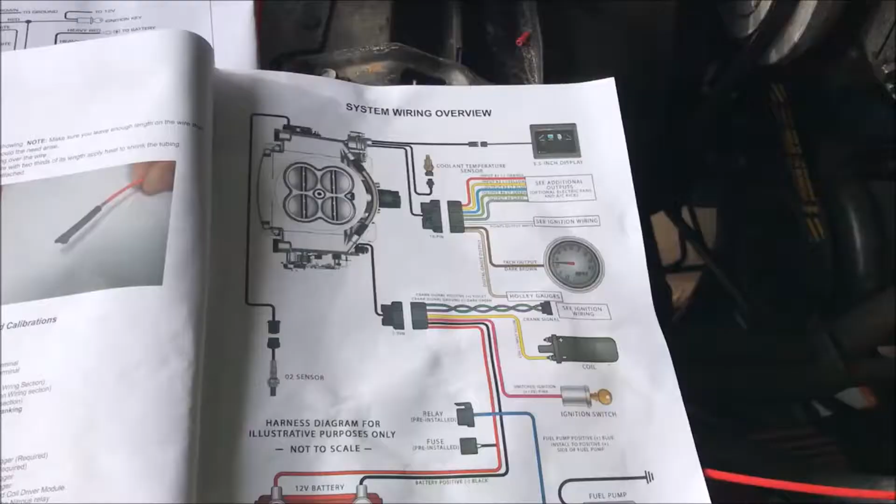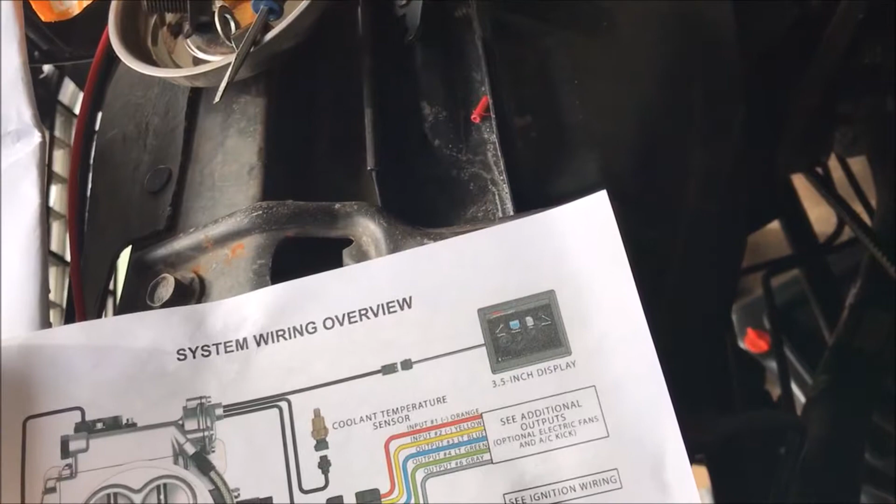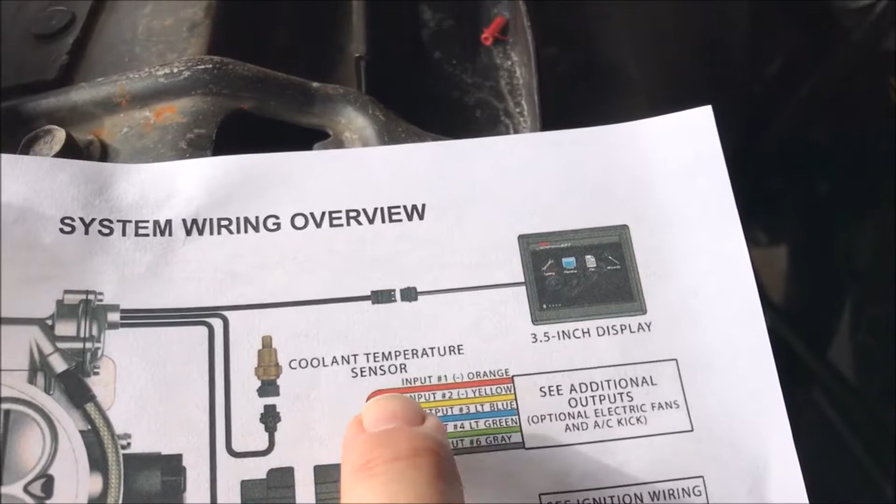Okay, so the last time I worked on this, I started wiring the EFI to the ignition box and everything. Let me show you. There's the main wiring. Currently I have the positive and negative on a battery, which is plugged into the 7-pin harness coming off there. I have the O2 sensor plugged in, the coolant sensor plugged in. I do not have the 10-pin because I don't know if I actually need any of that currently. It's got a tach output, which I'm not going to connect up right now. It's got Holley gauges, which I'm not going to connect right now. It has outputs for electric fans and AC kick down, which I don't think I'm going to need. So all I have to do is connect the display, and I need to connect the purple and green lines.

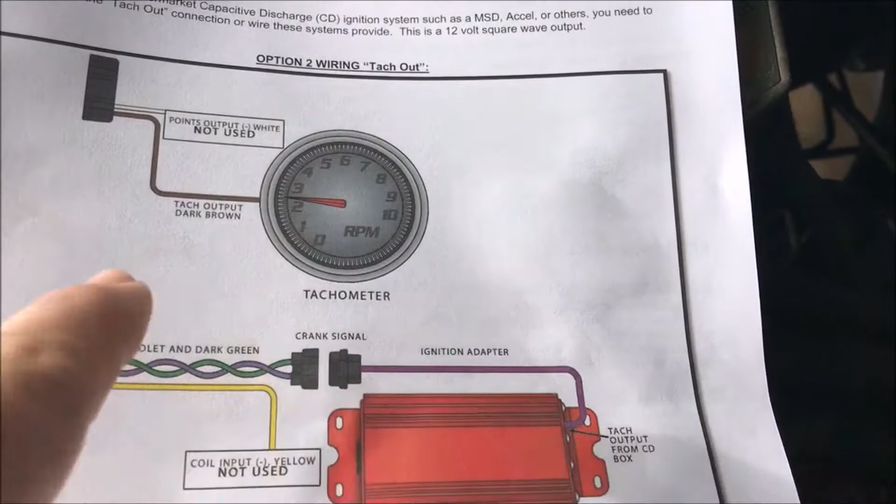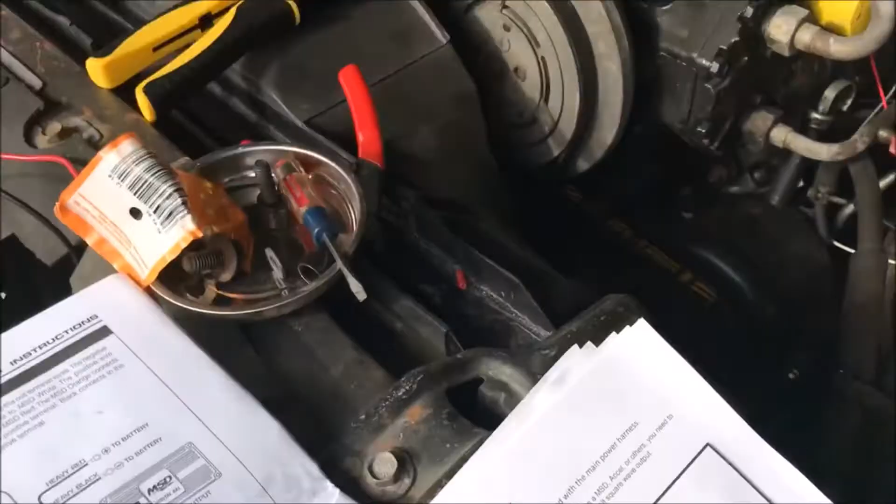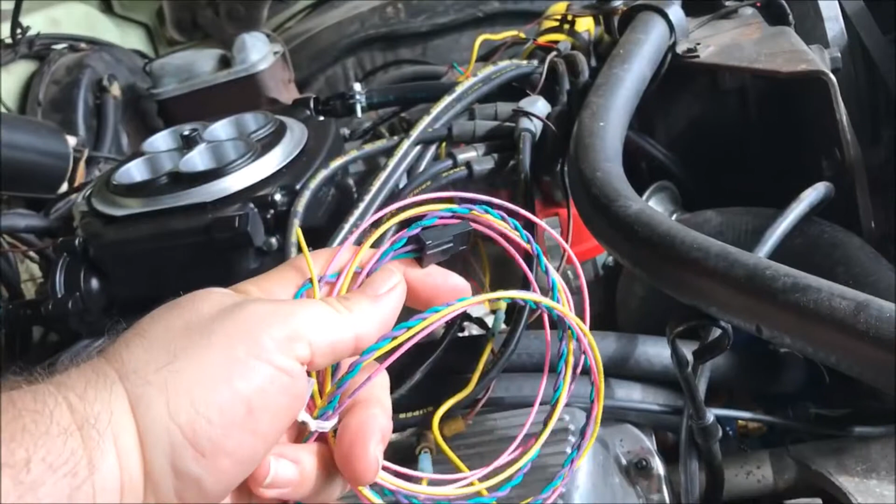So I turn the page, and the ignition I'm using is an MSD6AL. The yellow currently goes to the coil, but we're not going to use that anymore. I need to get the adapter for the ignition, which is going to come from the tach output from the CD box into the green and purple wires. And if you notice on my MSD wiring guide, tach out is a gray wire, and right here I have the gray wire. So I need to connect that gray wire to the ignition adapter and plug it into the green and purple coiled crank signal, which is in this bundle over here. So I need to find that adapter, and then just plug it into this connector, and I will have everything in the engine compartment wired up, even though it looks like hell.

I don't want to finish hooking everything up yet until I get it running, and then I'll clean everything up. I also went out and purchased some more heat shrink connectors, so when I clean this up, it's going to look a lot better. And I got a ratcheting crimper so that I'm crimping correctly rather than just doing it with a hope and a prayer. So that'll be part of the cleanup situation.

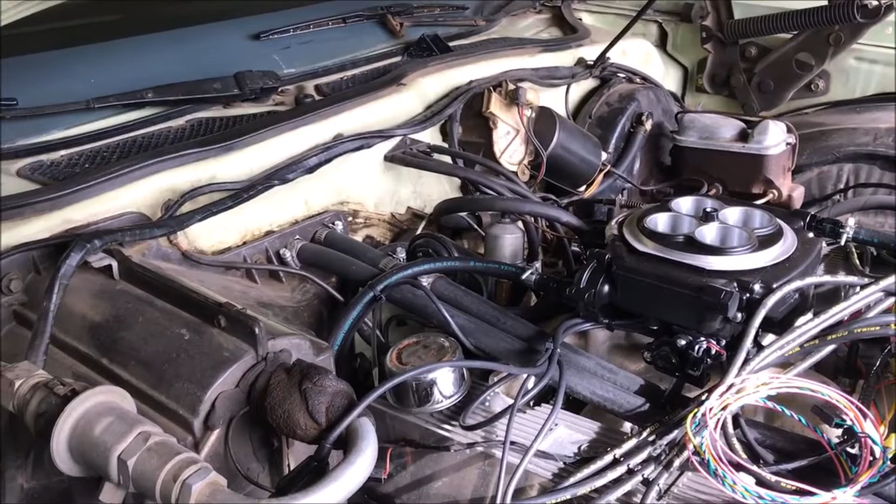Then when I get that hooked up, I got to figure out where to route the display wire through the firewall. So that may take a little bit, but we'll get it. Onwards and upwards. And then the last thing, I got to run the wire back to the fuel pump.

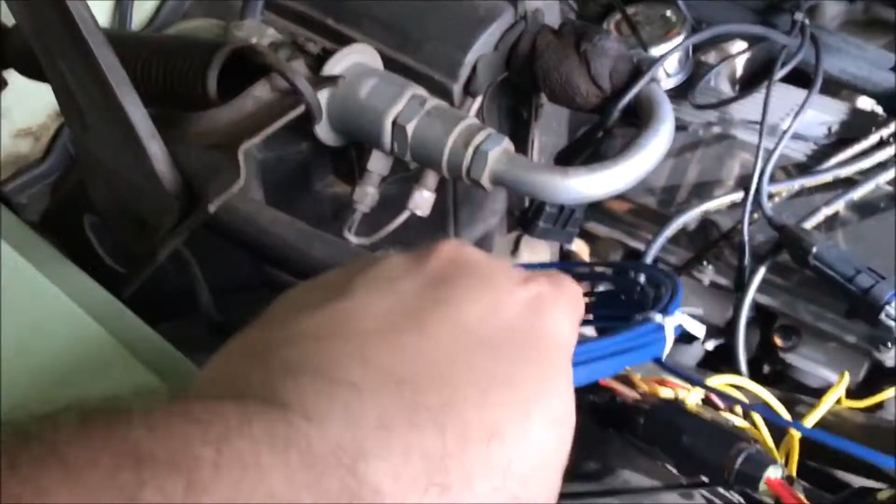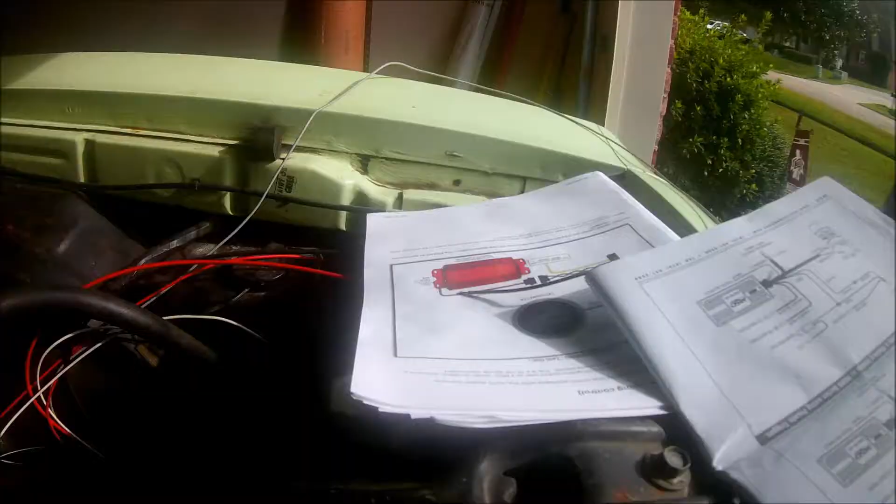You know, we're getting there. Happy, happy, joy, joy, and all that good stuff. All right, so I have the red, which is the absolute smallest butt connector I can get. That goes in there. I'm going to try my new ratcheting crimpers, see how they work out for this end.

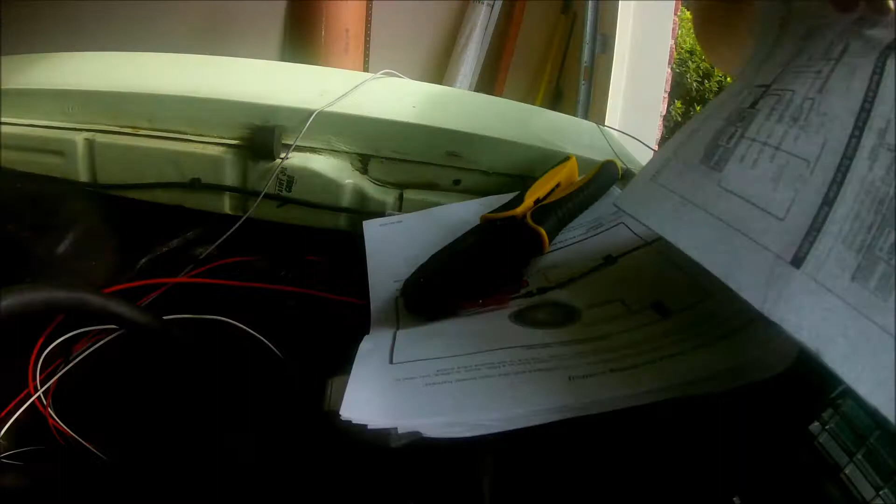And they're perfectly crimped, love it. Now we'll get the connector for the adapter, nicely heat wrapped, so that we can connect it to the tach output.

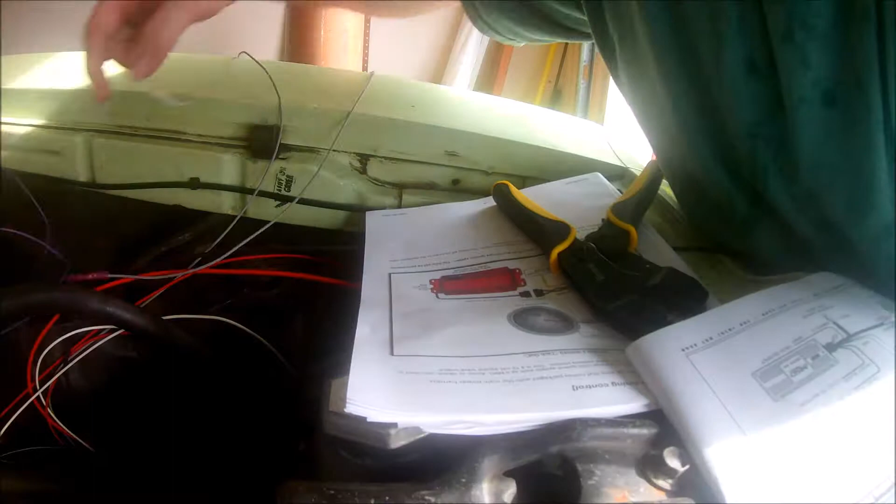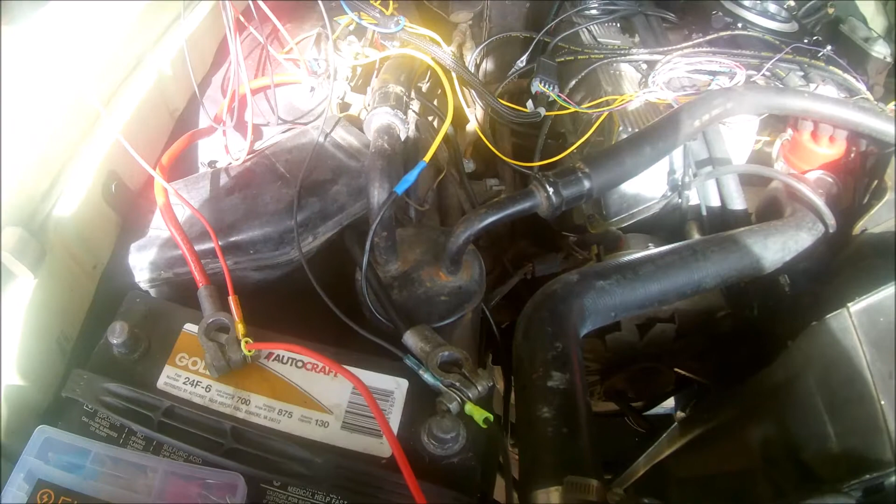I just got to make sure I don't have it get eaten by the fan. I think I got it. And it's plugged together, so there we go. It's now wired into the EFI. So everything, even though it's a mess, is done up here. Now I have to go do the next thing, which is mount the fuel pump and the fuel tank, which is even more fun. I don't know if that's correct English, but that's what's next. So here we go.

Alright, so now I'm going to be back at the back of the car again, working on mounting the tank and the pump. Since I upsized the fuel tank, I went and got some longer carriage bolts. Hopefully it'll allow me a little bit more room to maneuver the stuff around. That's my goal, at least, so I can get the fuel filler nozzle in and get that all buttoned up.

And then once I have it up, I can measure for my fuel pump support or bracket. I got to figure out how I'm going to mount that. So here we are, and I'm just going to get under here and start working on it.

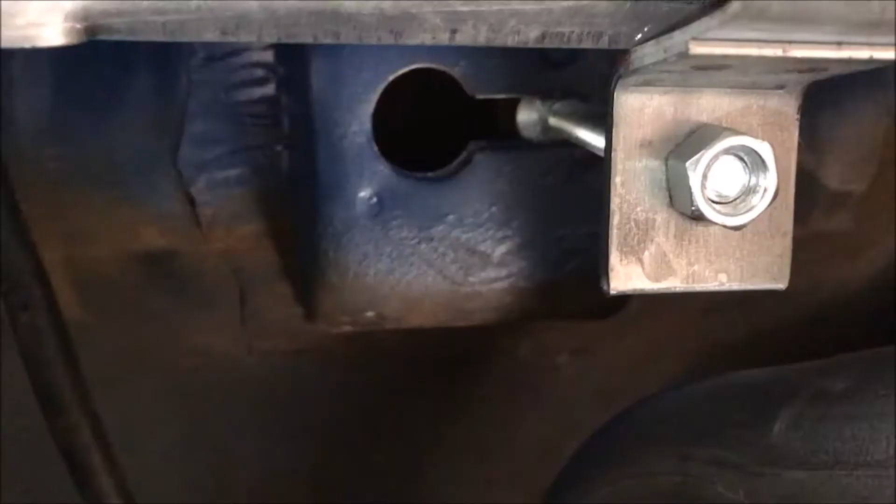All right, the longer carriage bolts are in, and they're going to work out great. What I think I need to do, since the angle of the inlet on the tank is different on the '74 and up tanks, I'm going to get some jack stands, support the front of the tank, release the straps, and lower it so I have a better approach angle into the filler and the new gasket. Hopefully that'll work.

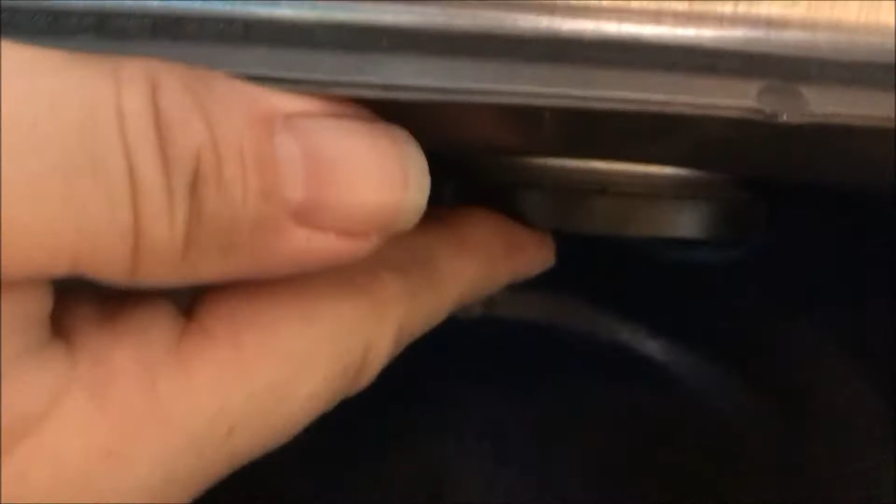That's my biggest stymie right now. Get that fixed, then we can move on to actually setting the pump and so forth. So that's what I'm working on.

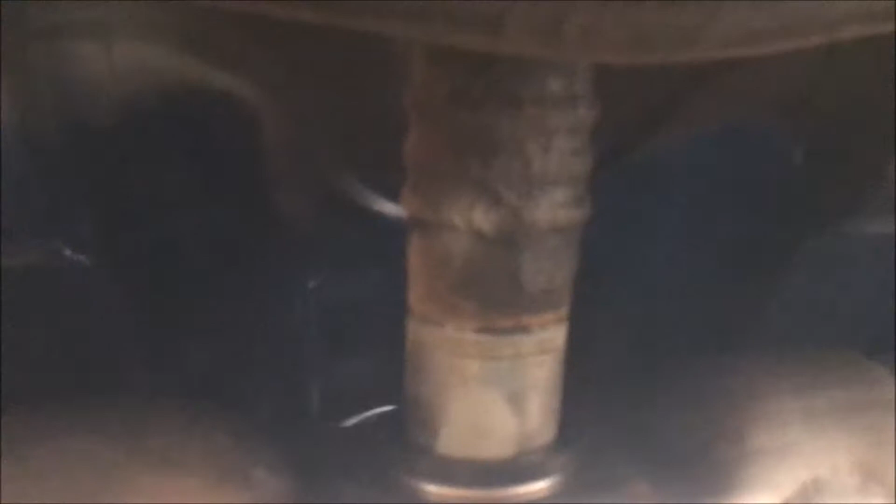All right, so I have it started. I loosened the straps at the front, I have it on jack stands. I need to lower it a little bit more so I can get it all the way into the tank, but it's moving in the right direction.

Well, I decided to attack it a different way. I took the filler neck out altogether. I installed it in the tank, and I took the license plate bracket and all off so that I can feed the filler neck through the hole and then mount the tank, because I wasn't getting it coming back the other direction with the tank mounted with the filler neck going through. So just a little, let's see how this one works.

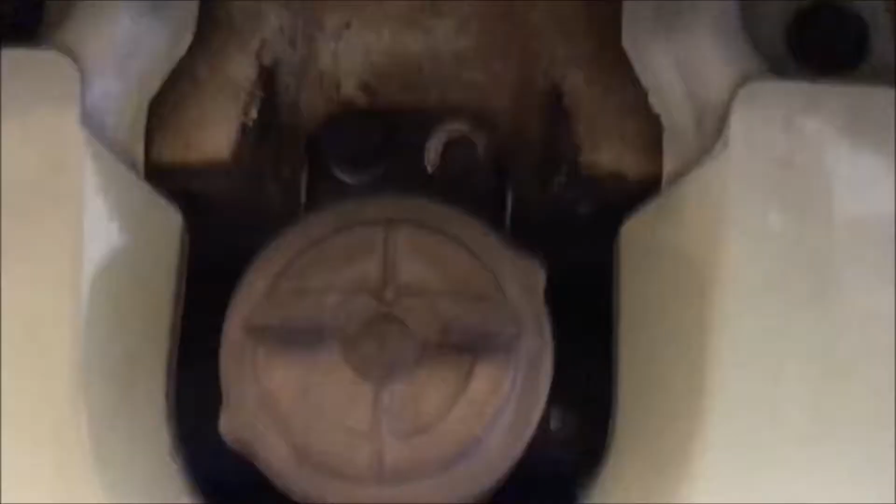Alrighty, that was a trick. Trick was mounting the fuel filler in the tank and then lifting it up and installing it. And then I got it attached with the brackets. What I think I'm going to do is build a bracket across from bolt to bolt, and then use that to support the fuel pump assembly. So that's my next step.

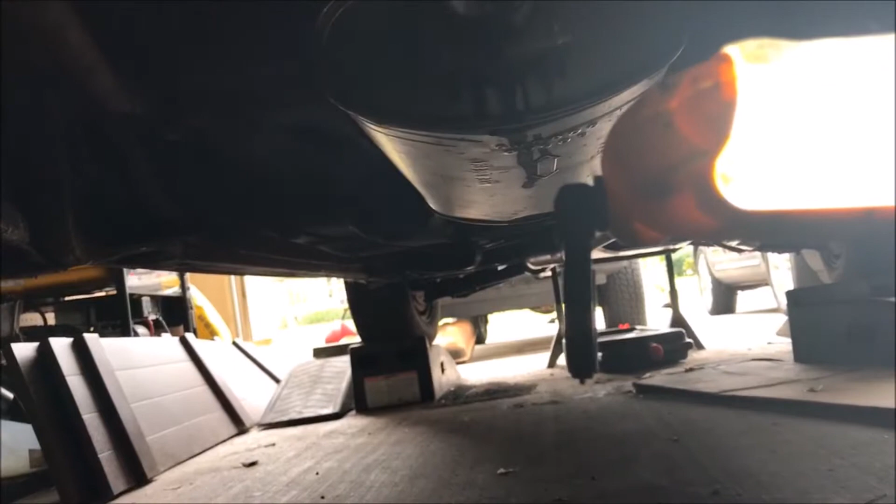All right, after I got the tank in, I got to make the bracket. The bracket is 16 inches center to center on the bolts holding the tank up, and it needs to be 6 inches down. So it's 6 inches by 16.

Well, I think I've come to the end of this particular video. I'm going to edit it tonight and try and get it out tomorrow. The reason I've come to stop is because the weekend's approaching, and this weekend I intend to get it all done and running.

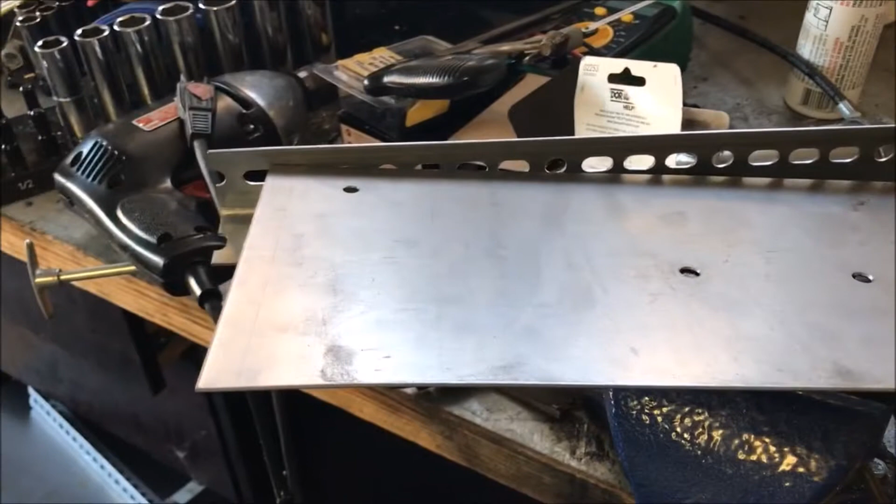As you can see, I've got my bracket cut. I got the plate that I'm going to mount my fuel pump on. All I have to do is assemble it, and well, I'm going to paint it first and then assemble it. And then the fuel pump will mount right on there where those two holes are, and I'm going to mount it between the two carriage bolts that mount the straps below the tank.

So I've got the electronics wired, I got the tank installed. I just have to install the pump, hook that up, put some gas in the tank, and cross my fingers it'll start right up. That's the hope. And so this weekend I'll have this done, or sort of done. And then the next one will be putting my dual sync distributor in from Holley. So gonna keep my fingers crossed, and we'll go from there.